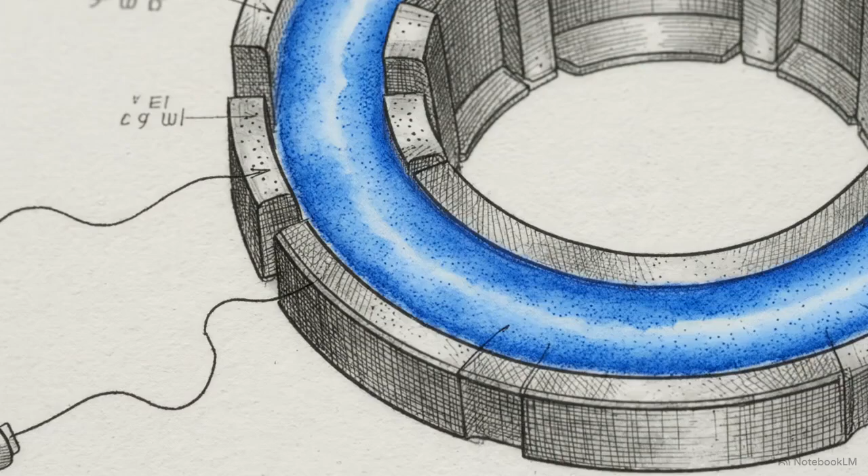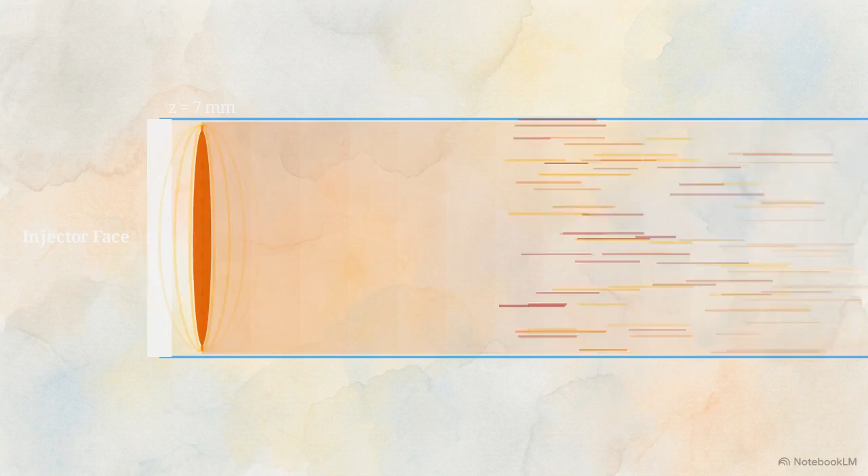A rotating detonation engine is often drawn as an annular combustor with a single wave racing around a ring. This paper looks past that simple wave motion to examine what happens after the detonation releases its energy, specifically how the channel shape dictates the internal flow physics.

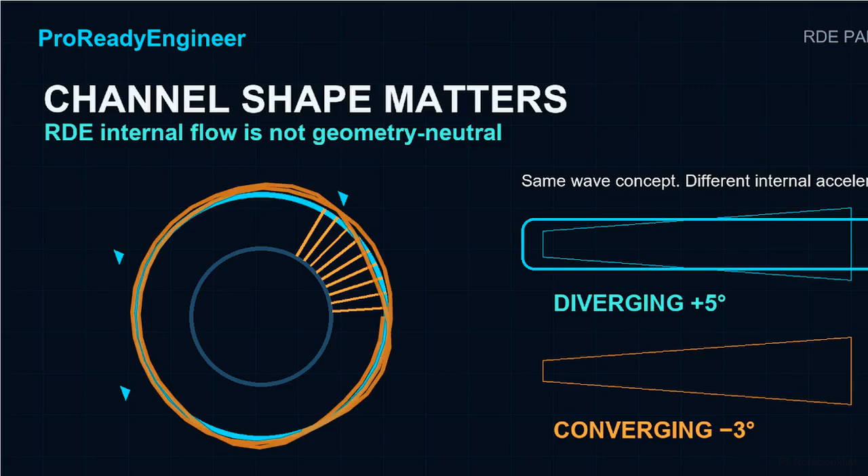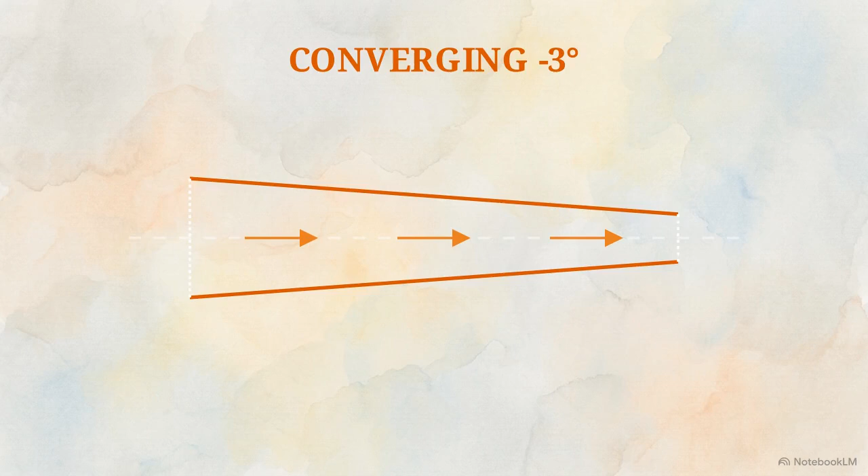To test this, researchers experimentally studied two non-constant area RDE channels. This comparison moves away from the traditional constant area annulus to look at how linear, converging, and diverging shapes change internal acceleration. One test article was -3 degrees converging, with an area ratio of about 0.4. The other was +5 degrees diverging, with an area ratio of about 2.6.

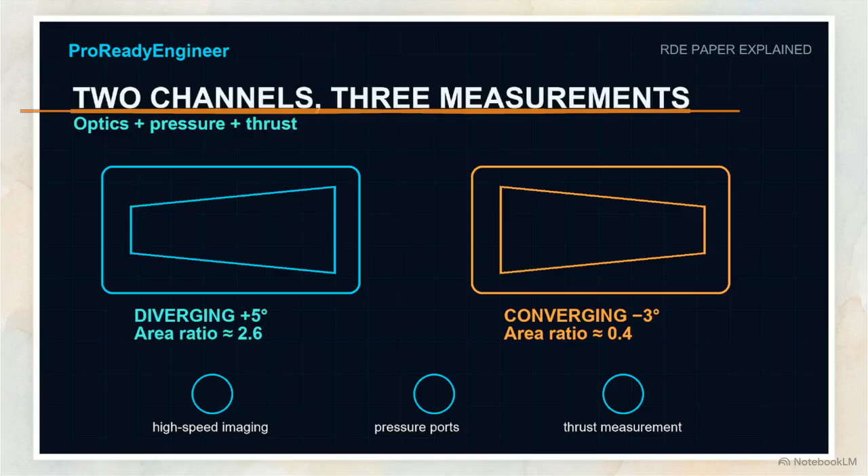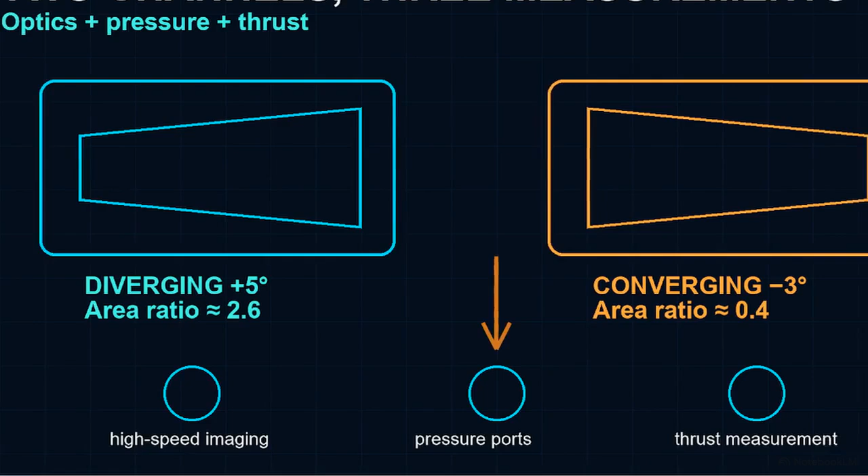The team used 3 specific measurement streams to capture the behavior of these two channels. High-speed optical imaging through a transparent wall allowed them to observe the rotating wave and shock structures. Axial pressure measurements through a metal wall mapped the internal pressure distribution along the engine's length. Finally, thrust measurements recorded during operation quantified the performance differences between the two geometries.

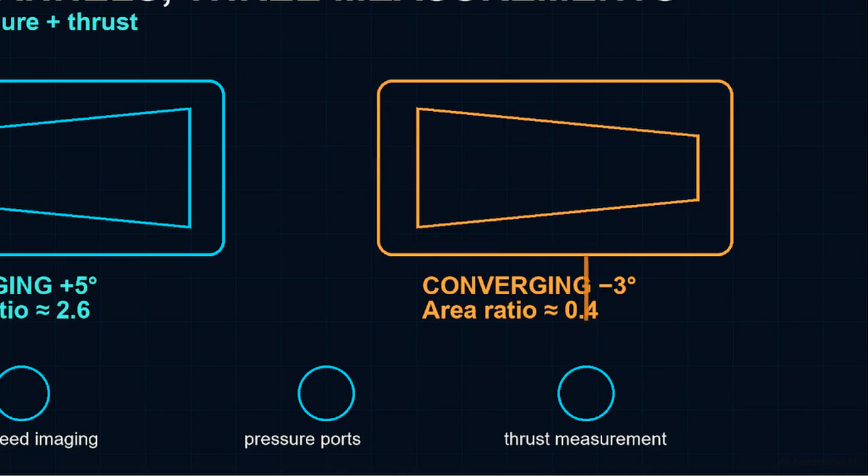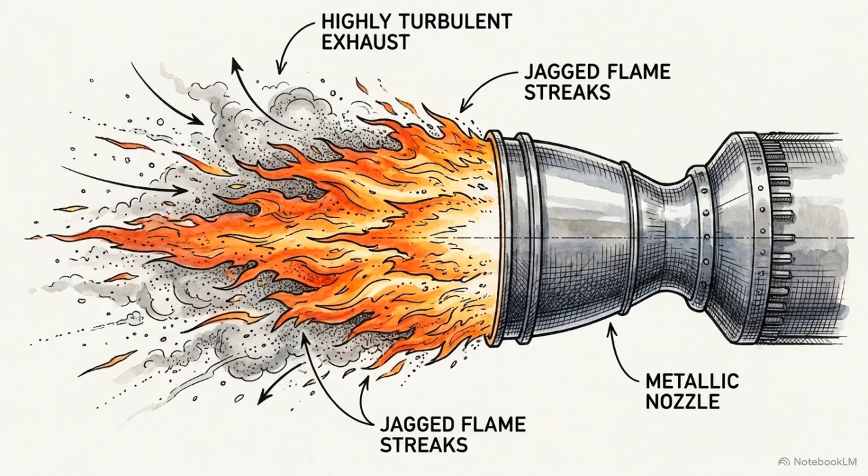In the hydrogen-oxygen tests, the observed wave speeds ranged from 1690 to 1920 meters per second. These values represent roughly 55 to 67% of the estimated reference detonation speed. Because these waves are well below ideal limits, the experiment captures the non-ideal flow physics found in real engine operation, where channel shape becomes a critical variable.

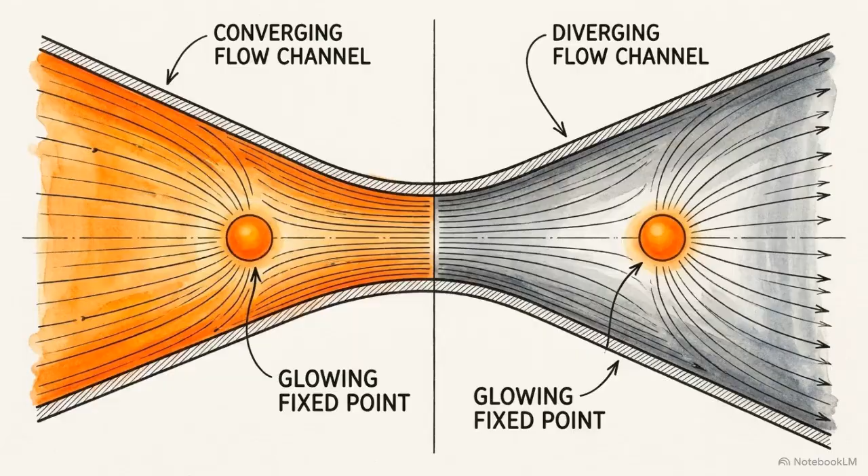To understand the impact of the geometry, we first have to look at what stayed the same in both tests. Optical imaging showed that the strongest luminosity, marking the main heat release region, remained near the injector surface regardless of the channel angle. For the hydrogen-oxygen cases, the peak energy release occurred around Z equals 7 millimeters. The authors interpret this as evidence that the energy deposition location is governed primarily by the injector and the initial filling height in the setup.

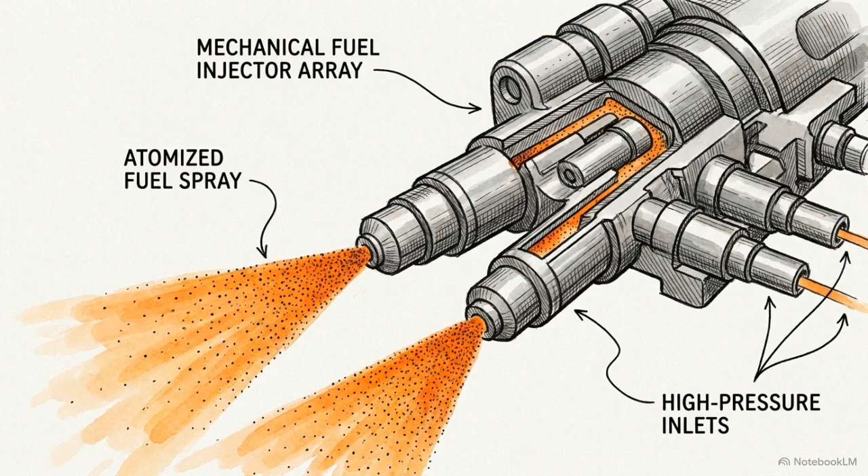With the main heat release pinned near the injector, the remaining length of the channel acts as the primary volume for developing and accelerating the flow toward the exit.

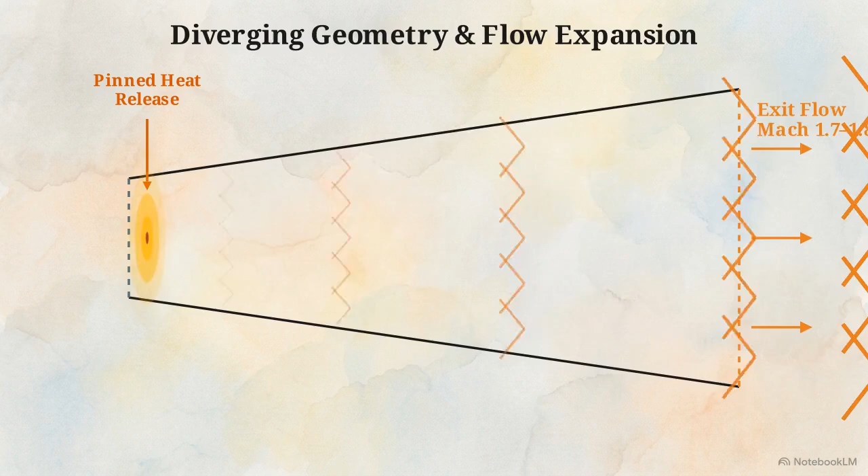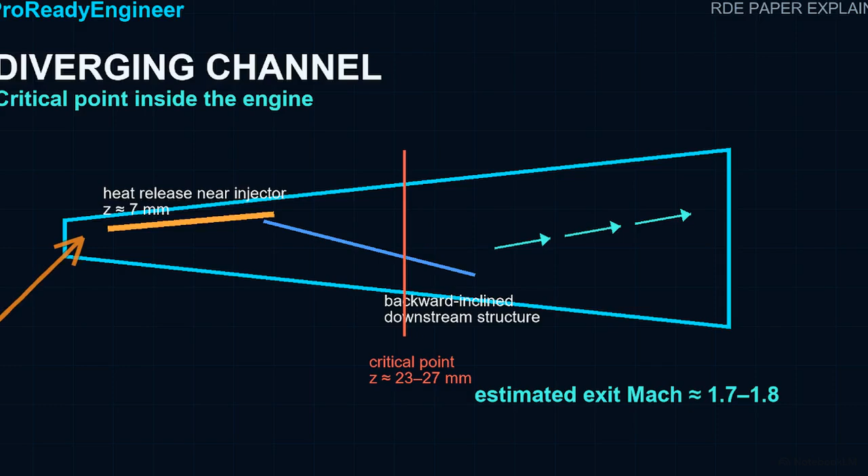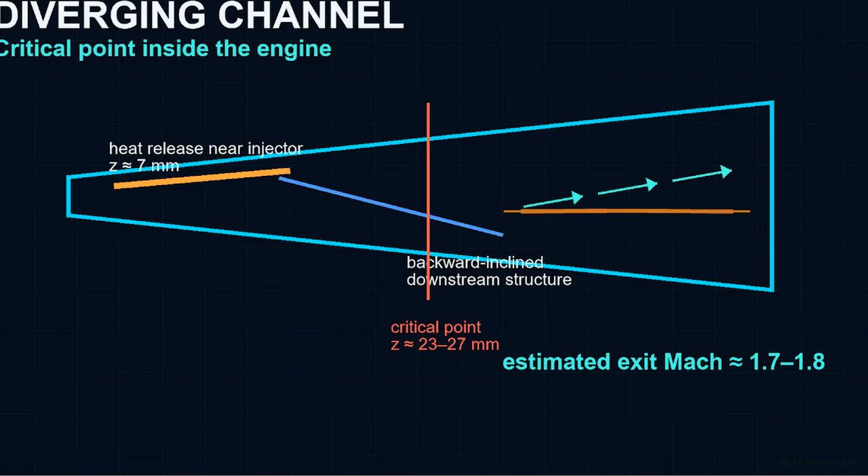Let's examine the internal structure of the +5 degrees diverging channel. This map shows the diverging boundaries, with the heat release zone highlighted orange near the injector. Downstream of that zone, the high luminosity region identifies the oblique shock structure. In this expanding channel, that downstream structure is inclined backward relative to the wave's direction. This geometry allows the flow to accelerate rapidly and reach a critical point inside the engine, well before it reaches the end of the channel.

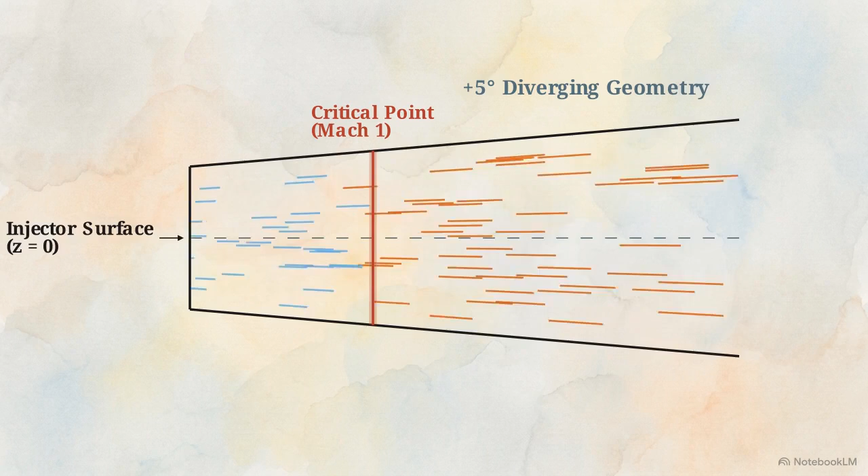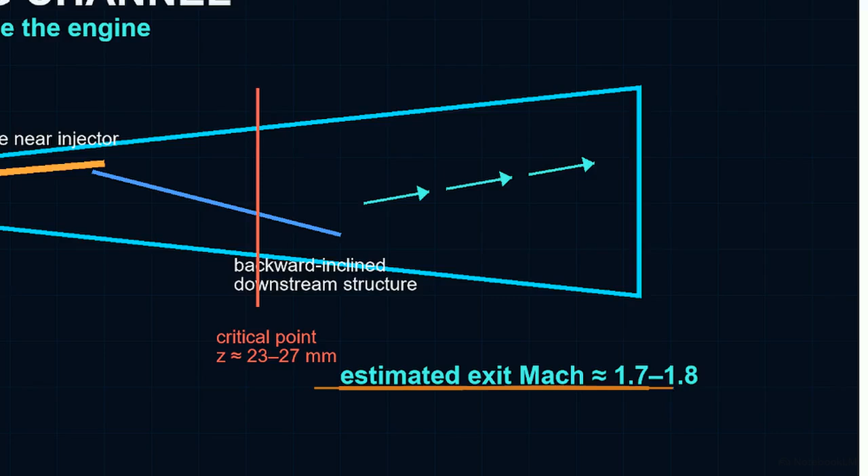This critical point forms roughly 23 to 27 millimeters from the injector surface. Under the author's quasi-one-dimensional interpretation of the exit velocity, the diverging channel reached an estimated exit Mach number of about 1.7 to 1.8. In this design, the heat release and the expanding geometry work together to drive the internal flow to supersonic speeds before it leaves the engine.

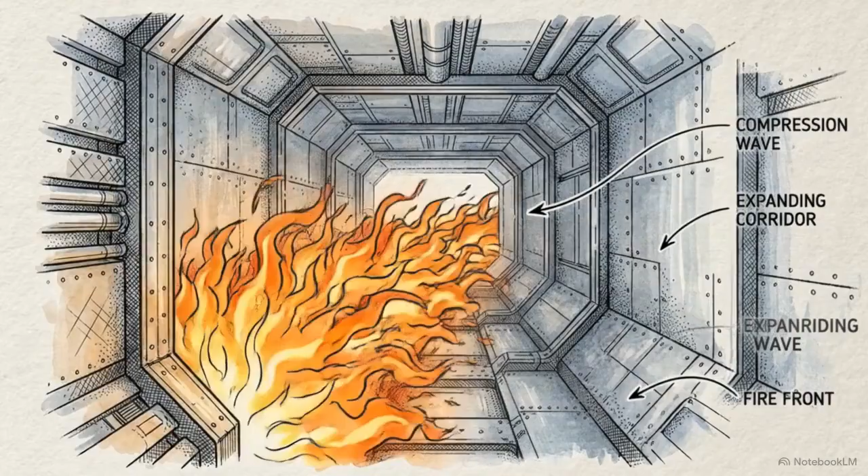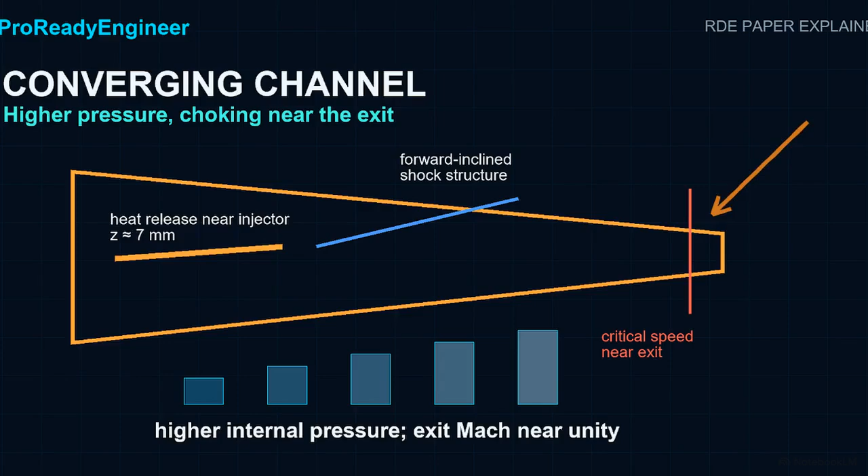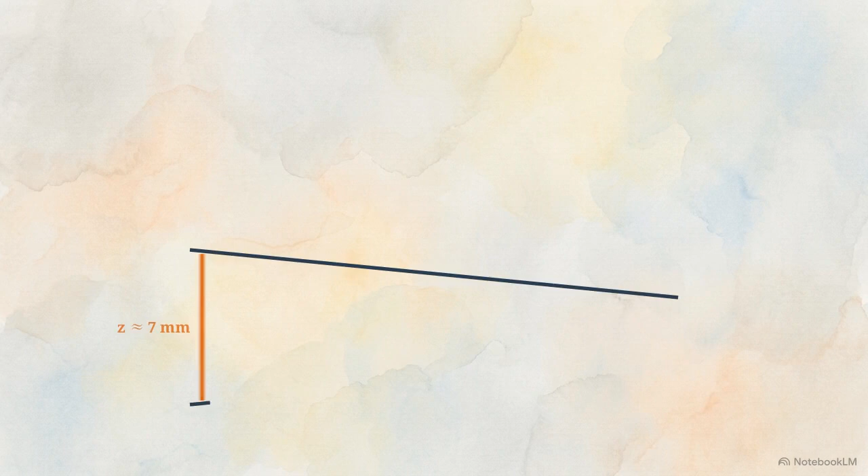The -3 degrees converging channel produces a completely different internal structure. The physical boundaries here narrow toward the exit, which alters the shock topology. Look at the orientation of the downstream shock structure in this geometry. Unlike the diverging case, this downstream structure is inclined forward relative to the detonation front. The converging walls force the internal pressure to build, keeping it higher throughout the combustor.

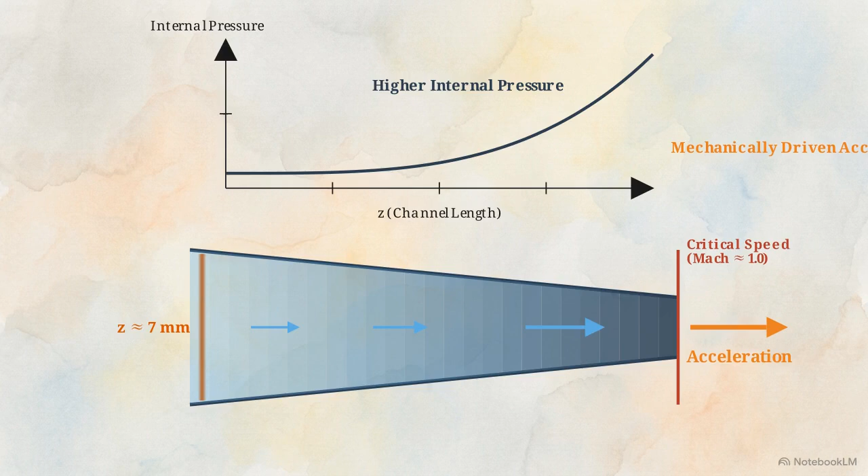This changes the acceleration mechanism. The physical area reduction provides the main mechanical acceleration, while the heat release primarily increases the pressure. This setup pushes the critical speed location all the way to the exhaust plane. In this specific experimental setup, the estimated exit Mach number was near unity. This converging geometry trades internal supersonic acceleration for higher internal pressure, with the flow only reaching critical speed as it exits the channel.

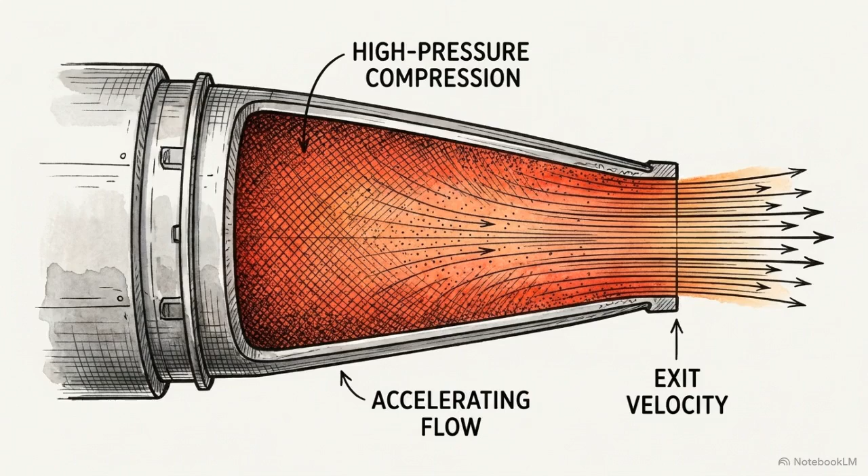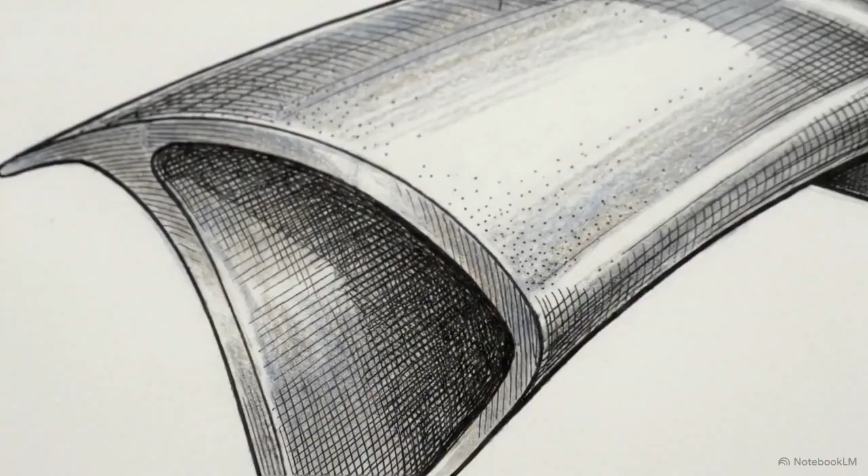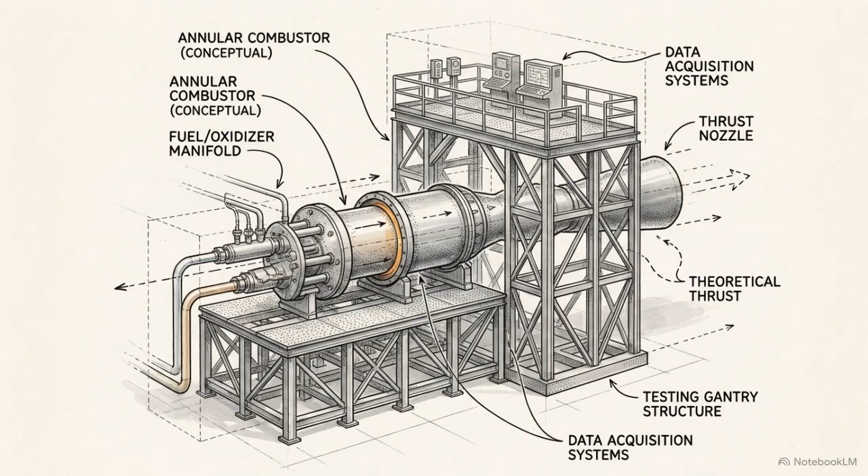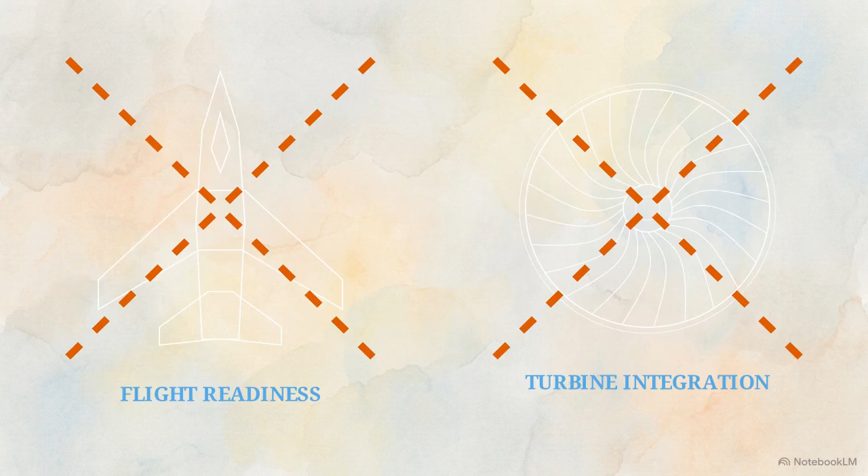However, there are strict guardrails to these findings. This experiment does not prove a finished RDE propulsion system. These results do not prove flight readiness, turbine integration, or a universal geometry that works for every engine. The measured performance in this paper does not guarantee total pressure gain performance across all RDE designs.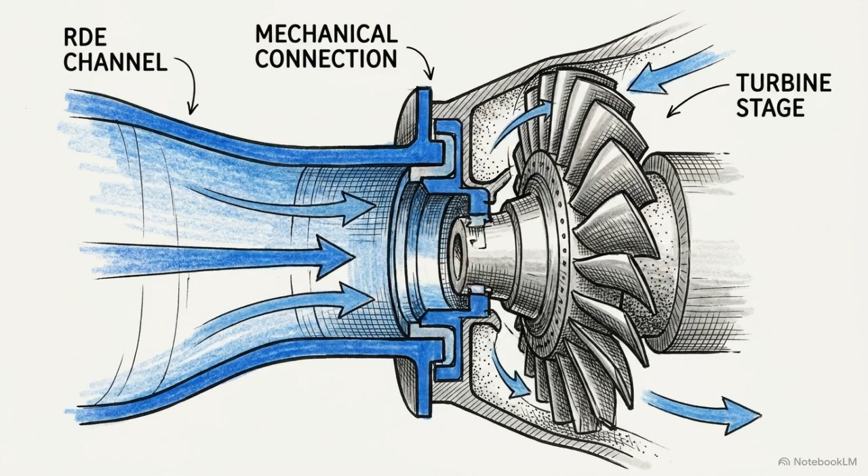The engineering takeaway is that the channel shape is a serious design lever that must be accounted for before an RDE can be connected to downstream hardware. By treating geometry as a variable, engineers can better predict and control how energy release translates into exhaust flow.